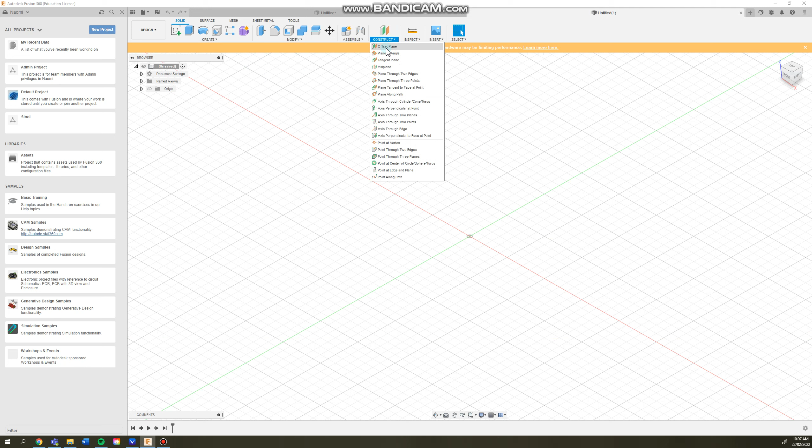So I'm going to start and I'm going to go construct offset plane. So from the bottom plane, I'm going to come up 10 millimeters. I'm then going to go construct again and create another offset plane 10 mil above that. So you can see that I've got my levels and my layers. So I'm going to create a sketch on that first level.

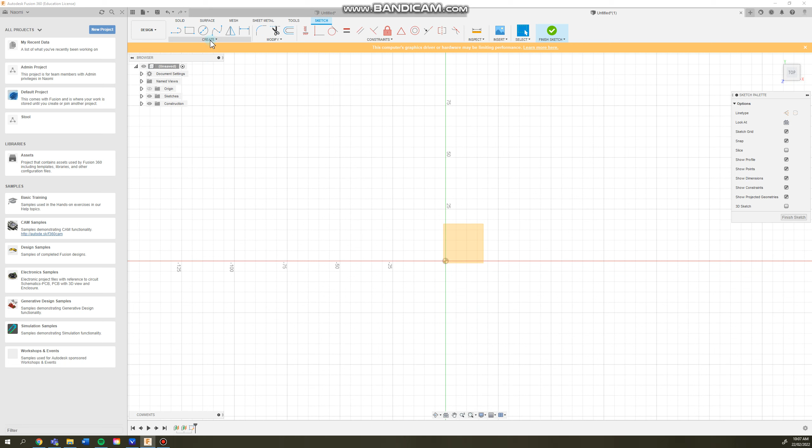And I'm actually going to work with an octagon today. So polygon, from the center always, change my number of sides to 8 for an octagon. Now I want my diameter to be 40, so I'm going to make my radius 20 mil. And I can go finish sketch.

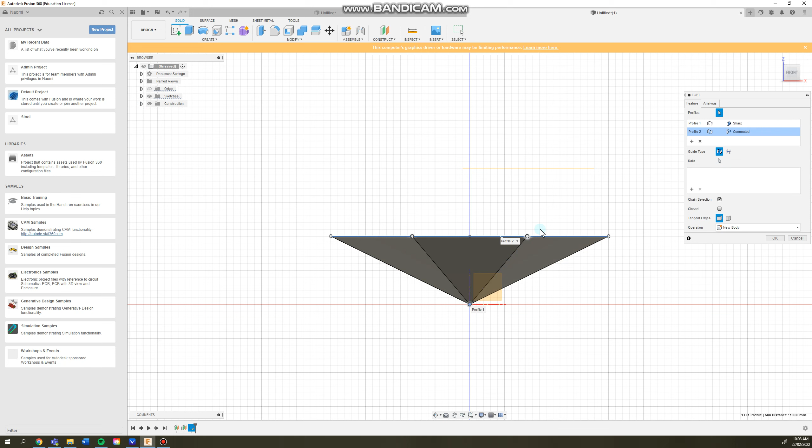Now I'm going to use the loft technique to merge from this center point to my octagon. So create loft. I'm going to first go on the side maybe a bit more. I'm going to select that center point. I'm then going to select my octagon I drew. And you can see if I come to my side profile that it's almost merged from this direct point in the middle into my octagon. And I'm going to click OK. There we go.

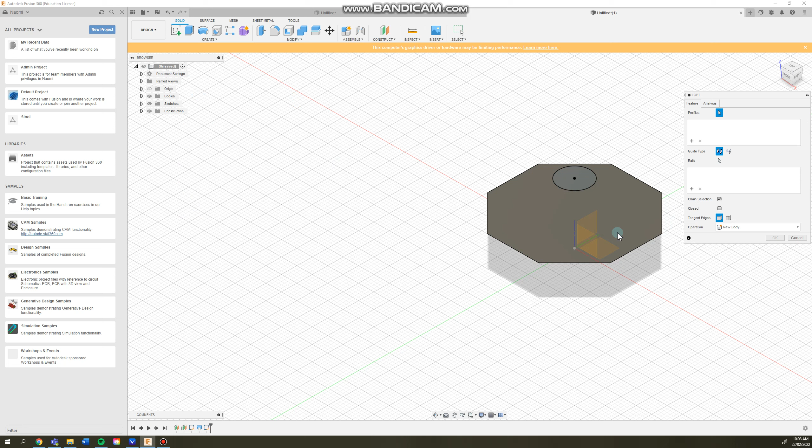I'm then going to create a circle for my spindle on my second offset plane I made. So again, always from the center. And I'm going to make, let's just say 10 millimeters as my circle. Now I'm going to go loft, create loft, and this time I'm going to come from my octagon to my circle. And you can see if I go side view on, it started to create a nice shape for the base of my spinning top.

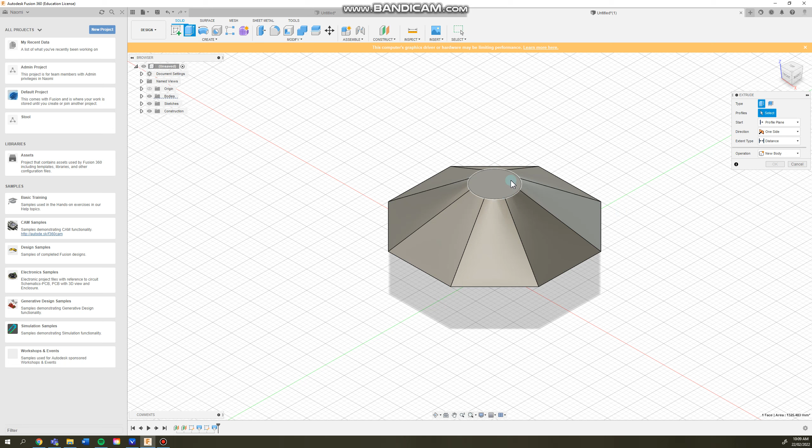To create my spindle, I can then use extrude, and what I'm actually going to do is use that circle I already drew and I can extrude that up to create a handle. Let's say I'll make it 25 mil and enter. So there we go, we've got a base kind of idea for a spinning top.

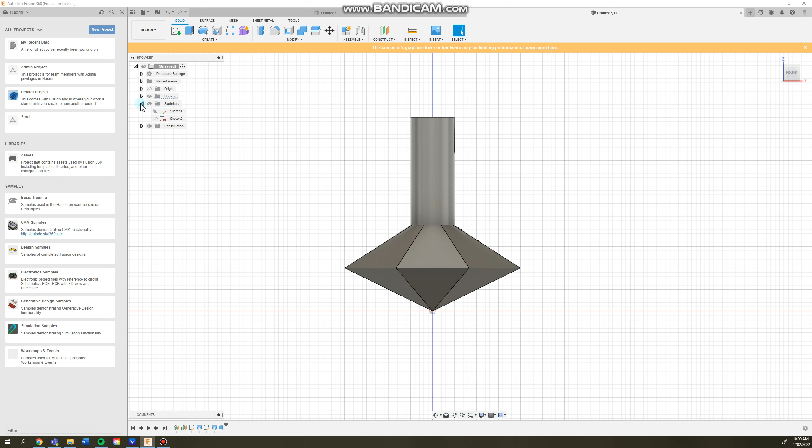Now if I look at this and I've determined that I think this spindle or the handle is slightly too thick, I can come into my sketch that when I drew my circle, I can right click and I can click edit sketch. Now I can change this from 10 maybe to 6, something a bit smaller. Finish sketch, and what that will do is just change it. So you can see the program of extrusion has still remained, but it is slightly smaller.

Excellent. And same if I want to change the height of my extrusion, I can come down here to my little timeline, come down to the extrude that I did, edit the feature, and I can change that maybe to 20 if I want a slightly smaller spindle.

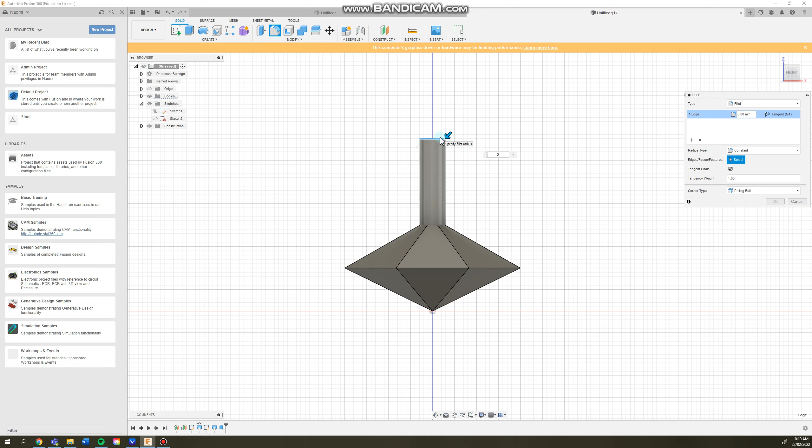Now I'd like to show you how to use the fillet tool to create nice little round edges in parts of our design. So I can come up to fillet under modify, and I'm going to select that top round edge, and you can play with different numbers. I'm going to work with a 1 mil fillet.

You can also do fillets along edges as well. So if I change this, starting to create a fillet down the bottom to create a bit of a merge. So you can see I can increase that. And it's just an easy way to start to create more of a round surface rather than a sharp corner. And there you go, a little spinning top using the loft and offset plane technique.